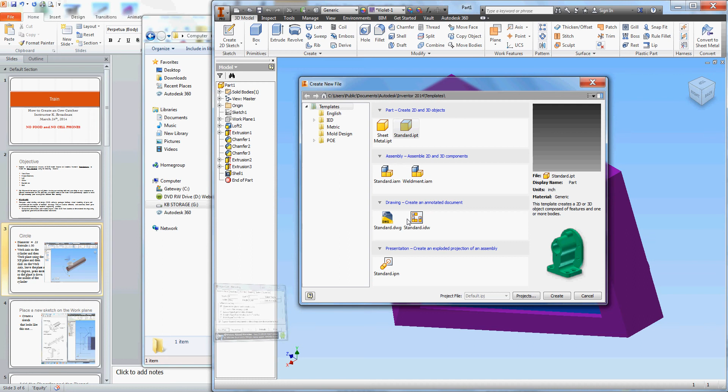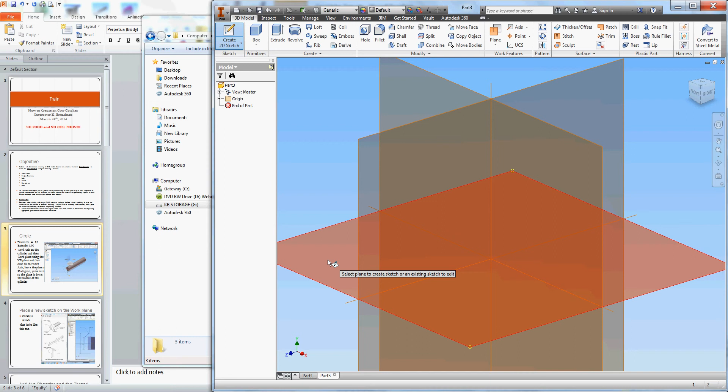Start off with a standard.ipt. Press OK. Go to create a new sketch. At this time you want to click on the XZ plane. Go back to home view so you can see the platform in which you're drawing on.

Now taking a look at the sketch for the cow catcher, you can start off with the bottom surface of a cow catcher by drawing a straight line. Now looking at this from the top view, you can see that some of my lines are not straight, so we need to fix them. Use parallel and connect my line.

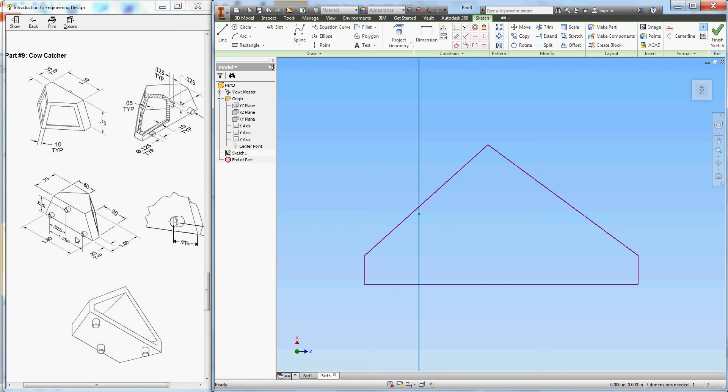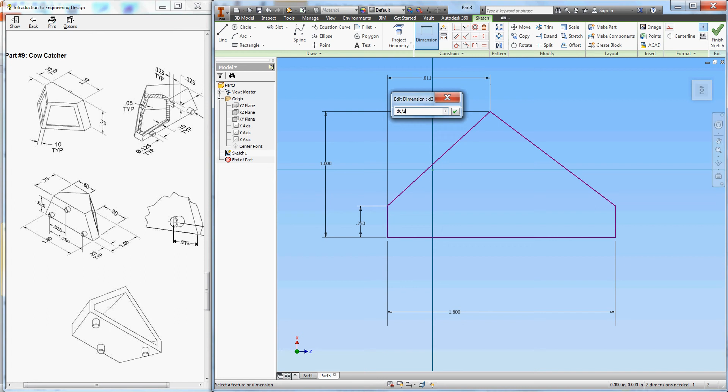Okay, so now that I've gotten my shape a little bit straight, I now can dimension it. Starting with the base, 1.8, .25, and from the base to the point here, 1 inch. Use equal to make these two equal. And we also need a dimension from the point to the side, which is half of D0, which is 1.8. That's your base.

We now need to finish the sketch and use a feature called work plane. Offset from the plane. Here's the plane I need to offset from. I'm going to drag up, and it tells me that the height is 0.75. I'm going to create a new sketch. On that new sketch, I'm going to project my geometry. The only geometry I need on this one is this back line.

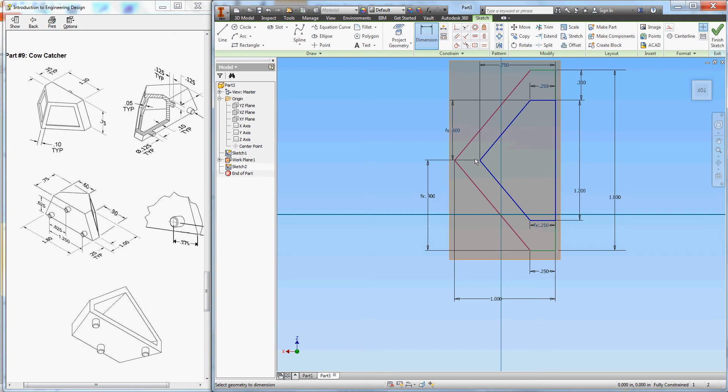I take that back. Let's go ahead and bring as much as we can forward. My line for the back line has to be 1.2 according to the top view there. .25 is the height for the side on both sides. Next, you would need to complete your shape and place the rest of the dimensions on to complete that shape.

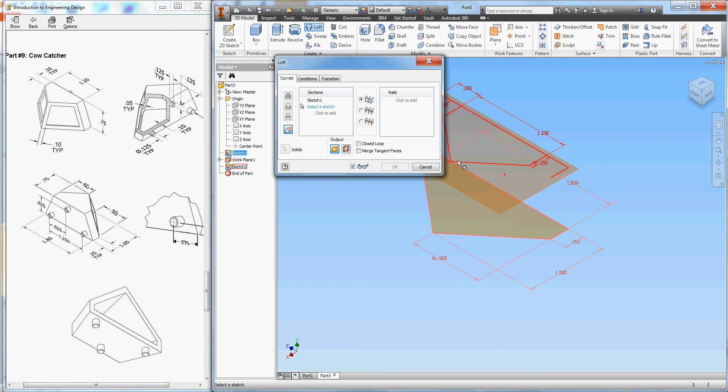So as I'm looking, I see 0.6 at the top and 0.75, not 1 inch, and 0.25. That's for the base. So keep in mind that the numbers are different at the top than they are at the bottom. I'm now designing the top. So from the baseline, this is 0.75. And from the side, it's 0.6 or half of the base. This also helps center it, but not completely.

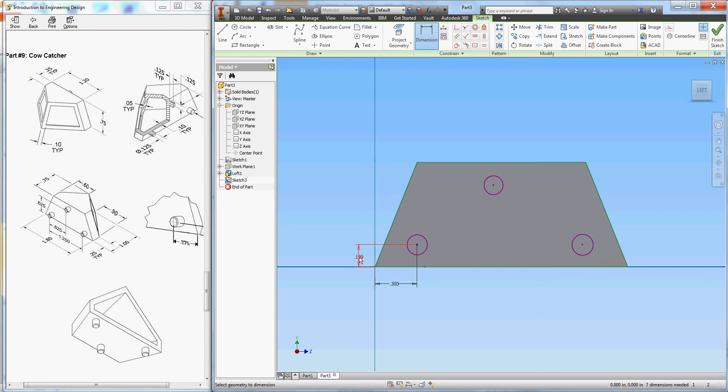If I take 1.8 minus 1.2, parentheses, take that total and divide it by 2, it will give me 0.3 to center my part. Finish the sketch, and you're going to use the feature loft. Click on the inside, right click, should allow you to continue.

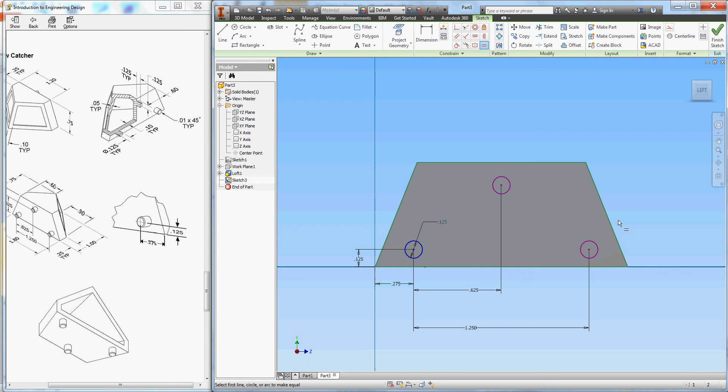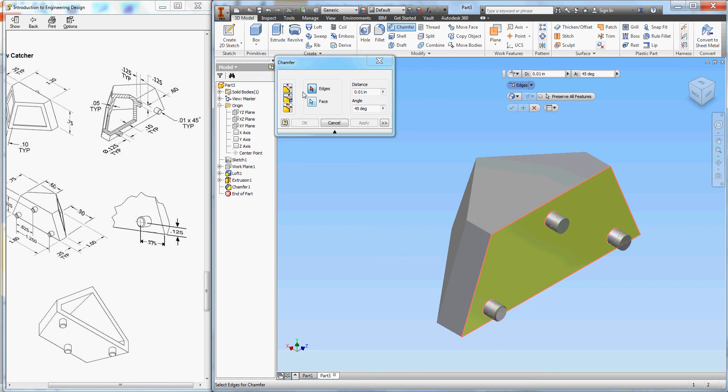The workspace I don't need visible anymore. I am now going to place dimensions on for the back. In this case, I need solid circles, not center points. Dimensioning from the edge to the point. The dimension for center point to center point is 0.625. The dimension from center point to center point of the bases is 1.25.

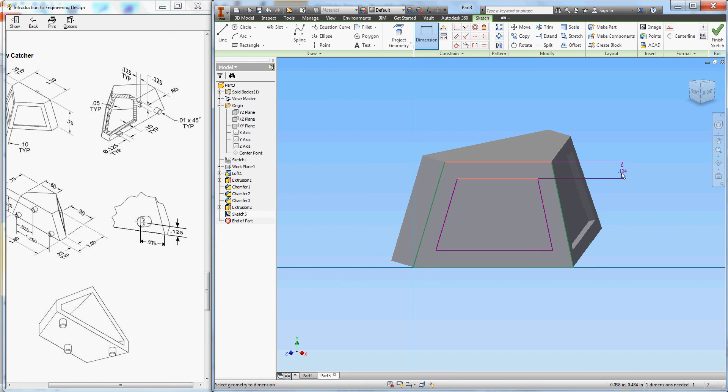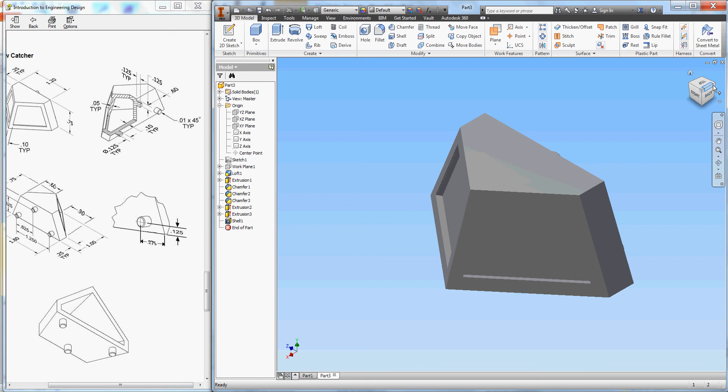The dimension in the corner here tells me the location of the first hole. It really doesn't matter which end you do this from. So as you can see that is 0.125 and 0.275. Dimension the circle itself, right here where it says TYP 0.125. And what I'm going to do is make all the other circles equal to the first one that I've dimensioned. Learn to flex your geometric constraints.

Finish the sketch. Extrude all 3 circles, 1, 2, 3, at an extrusion distance. It shows me the distance here, again, TYP 0.125. I have to put a chamfer on at a distance of 0.01, 45 degrees. So face, apply, face, apply.

Now, I should be able to place a sketch on this surface. Click on offset. And I should have a 0.10 offset dimension. Should be able to extrude, cut 0.05, and the reason why it's 0.05, 0.05, 0.5. Press OK.